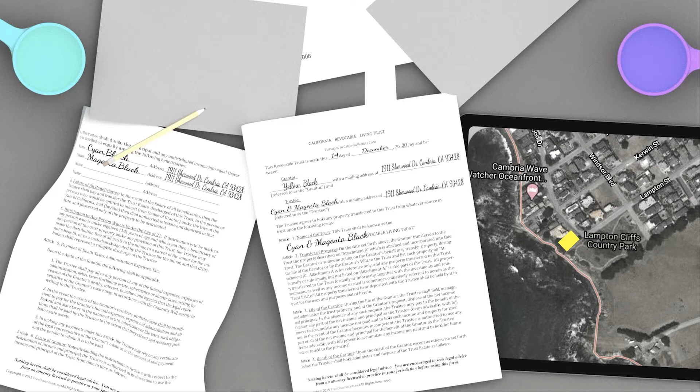There once was a mother and her twin sons who lived in a house on the Cambria coastline. Tragically, the mother passed away, but not before leaving her possessions to her sons. Her living trust stated that the twins should use all of her money to build themselves a new home.

The twins had a lifelong rivalry and were always competing with one another. Thus, they agreed to let decisions over spatial divisions in the new house be decided over tactical games, a form of competition they both excel at.

The twins used their inheritance to turn the original single-family house into a duplex. While they tried their best to split everything 50-50, there were multiple rounds of negotiation, and ultimately this resulted in a game of tug of war inside the house.

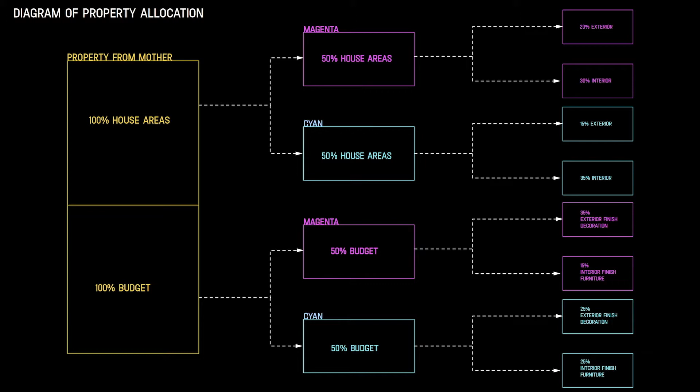The design process started by analyzing the house's existing timber frame structure. By dividing the house into 64 cubes, each twin gets a total of 32 cubes of space.

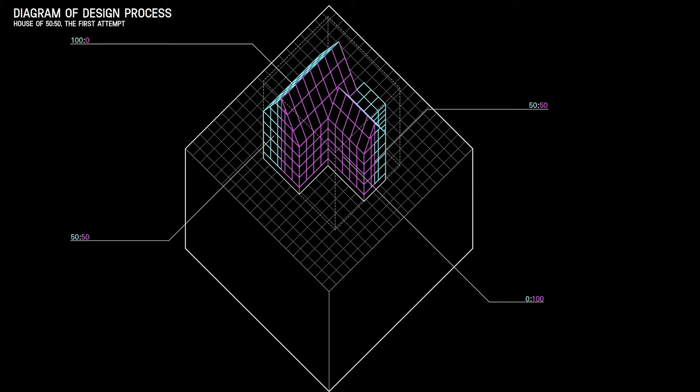On the first attempt, each twin only received 2 facades of the house. Cyan was not very satisfied with their space compared to that of Magenta.

On the second attempt, the twins received equal real estate on each side of the house, to resolve the issues of the first attempt, yet this time Magenta was unsatisfied with the results.

He wanted the two houses to have more differences between them. Finally, to resolve this final issue, Magenta rotated his house 13 degrees, successfully creating 2 distinct volumes within the same body.

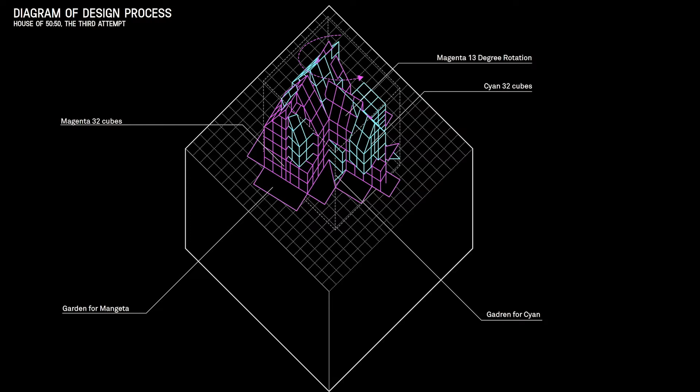The central conflict of this project is that the twins are seeking different identities even within identical bodies. Their differences are often masked by physical similarities.

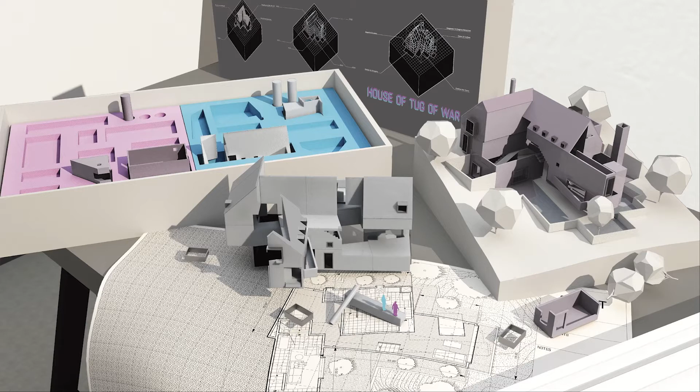Once they settled on the basic design principles, they hired an architect to further develop the house. The battle over the design can be understood from various perspectives: the elevations, the plans, and the interior organization.

First, the east elevation. The east side of the house faces the street. Cyan uses aluminum panels, while Magenta opts for bricks as an exterior finishing material. The clean 50:50 separation on this side of the house expresses the duplexness of the house.

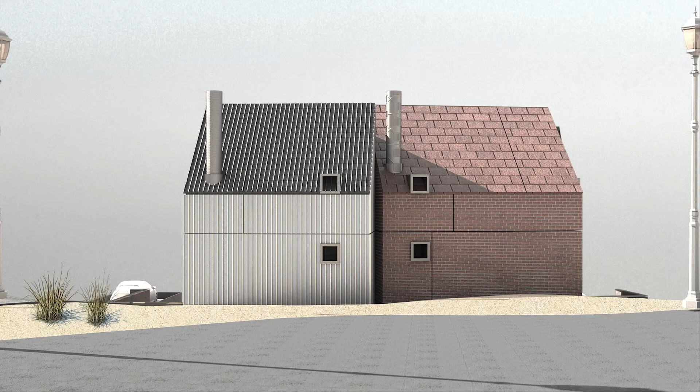However, if you look carefully, Cyan's house is slightly larger than Magenta's house, which intentionally casts a shadow on the Magenta side. This subtle deception, preventing one brother's house from receiving sunlight, is one way in which the rivalry plays out. Second, the north elevation.

The twins enter from opposite sides of the house. Compared to Cyan, Magenta occupies more area on the north elevation. The colliding windows and the distorted rooflines further illustrate the traces of the design battle.

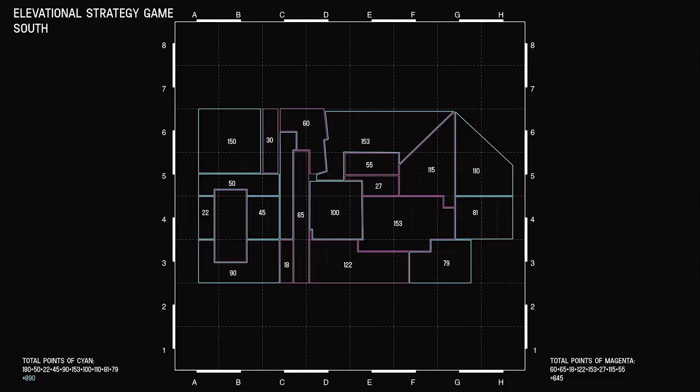Next, the south elevation. Cyan successfully receives more space on the south side of the house. In retaliation, or maybe it's a budget issue, Magenta uses cheaper bricks on this side, driving down Cyan's south facade curb appeal. Finally, the west elevation.

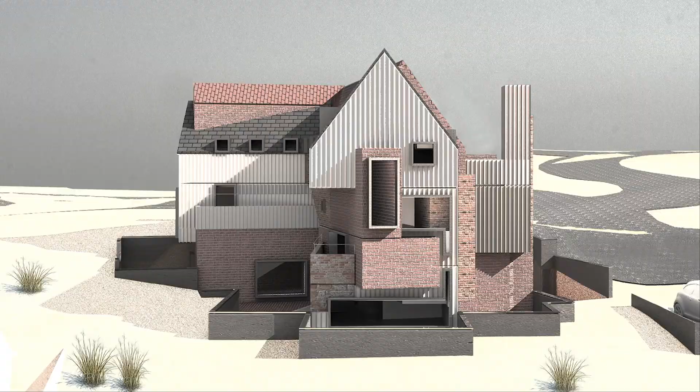Both brothers want the same amount of space on the west side with ample windows because the side faces the ocean. Next, we'll move on to the second spatial tug of war: the plan strategies. Each twin receives 3 stories of the house with the same area on the ground floor.

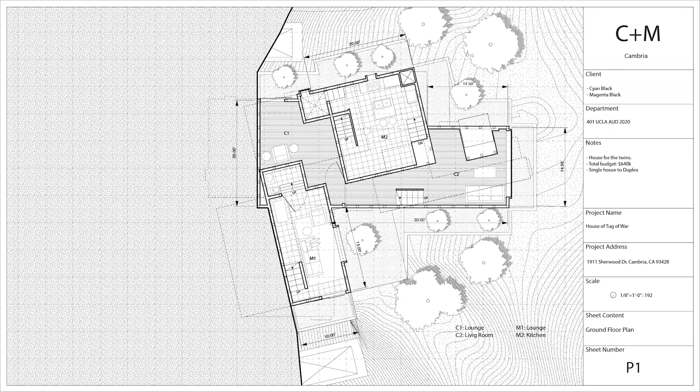Cyan's vision for a large connected living room on the first floor impedes and detracts from Magenta's space, so his living rooms are isolated on opposite sides of the house. To rectify this, Magenta gains more space on the second floor, where kitchens and dining rooms are located.

Magenta's original 13-degree rotation is an important strategic move to remember at this point, because through these plans we can understand its true purpose of carving up Cyan's space and creating obstacles wherever possible.

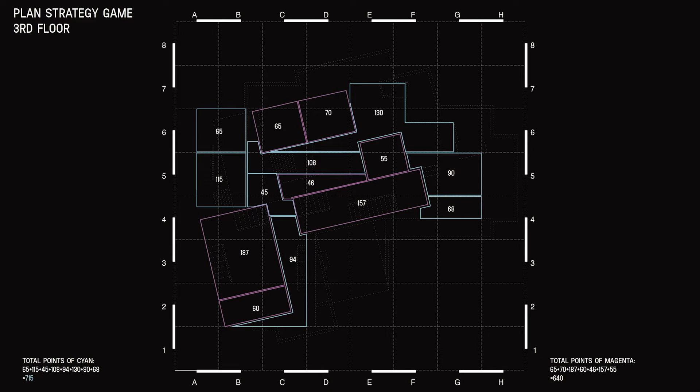With equal space on the first floor, and Magenta receiving more space on the second floor, it's only fair that Cyan occupies more square footage on the third floor, where the balcony, roof garden, and bedrooms are located. The roof garden is the only place where they are spatially connected, and the result of having more exterior spaces means needing to take a detour to the balcony before going to the bedroom.

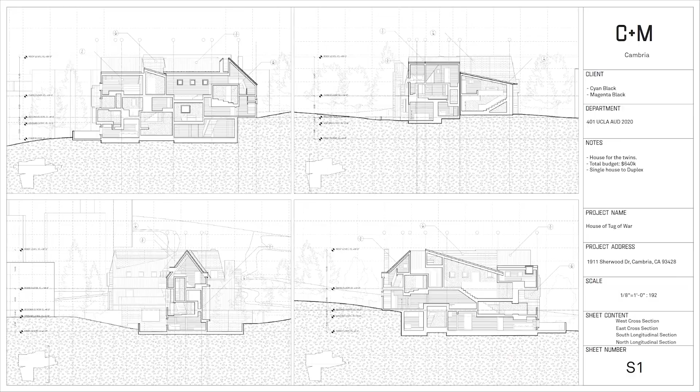These sections show how the twins sabotage each other through elevational obstructions and misalignments. Cyan's rooms are connected via continuous circulation, while Magenta needs to take detours to get to his rooms. The continuous redlining by each brother underscores the lengths to which each goes to interfere with the other's space. The four following chunks articulate this game of interference in greater detail.

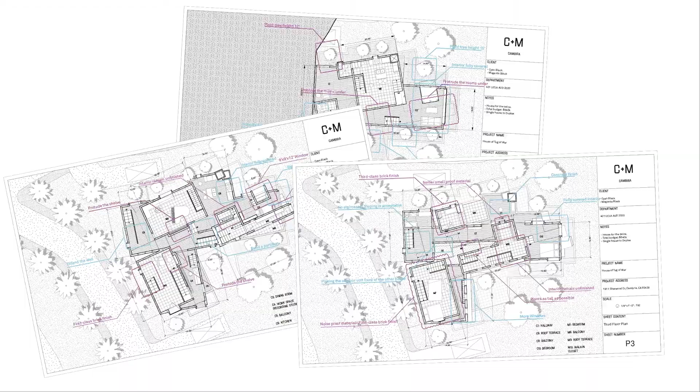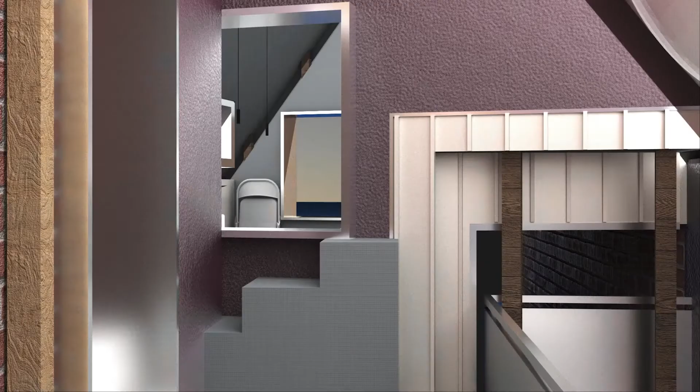The first chunk shows Cyan's bedroom and Magenta's hallway. Cyan has the best ocean view from his wonky bedroom. Due to the layout of these two spaces, Magenta is forced to look through Cyan's room if he wants to look out the window and see the ocean. Magenta finished his hallway with very low-quality materials, to distract from and hopefully ruin Cyan's ideal bedroom views.

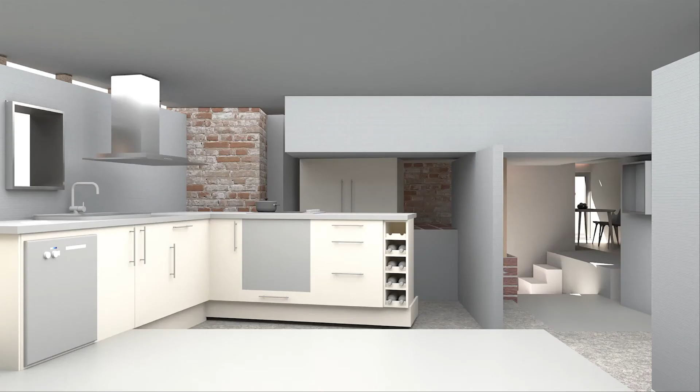The second chunk shows the boys' kitchens and dining rooms. While Cyan's kitchen and dining space are both visually and physically connected, elevational differences make them not very user-friendly. Also, the window from his brother's rooms is meant to be used as surveillance, but the partition gets in the way. In Magenta's case, the kitchen and dining rooms are not on the same floor, which makes setting the table and bringing food to the table a difficult task.

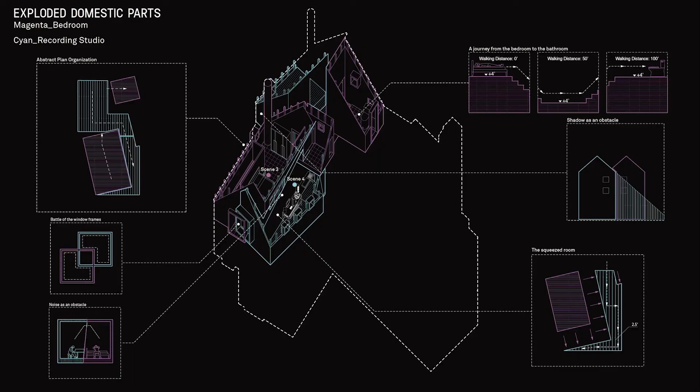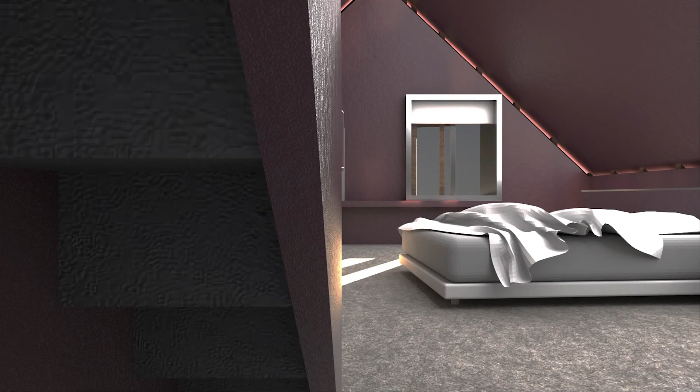Next, we'll look at Cyan's recording studio and Magenta's bedroom. The result of protrusion from the other room makes the 2.5-foot-wide workstation hard to use. The confrontation transmits noises to disturb the sleeping quality of his brother. The interior gets its identity by reflecting each twin's tricks.

Finally, we'll check out the roof garden. This area is the only place where the twin spaces intersect. The two houses are spatially connected, but subtle landscaping decisions mark the demilitarized zone. Look closely at the plants and you'll see the shadow war being waged.

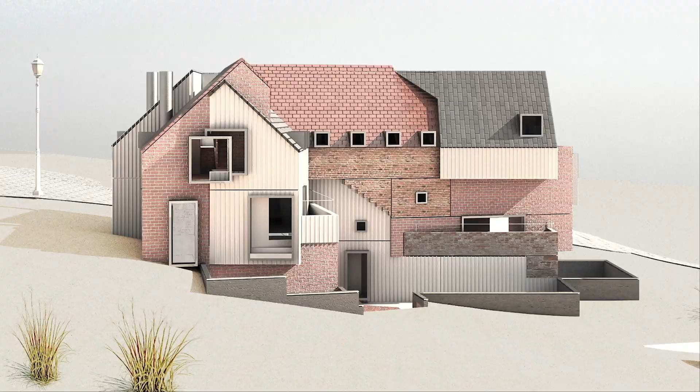While the design process involved so many negotiations between the boys, the battle between twins will never be over. Throughout the studio, we learned how to depict the narrative, and therefore turn the architecture—in this case a single-family house—into a medium to paint the family portrait.